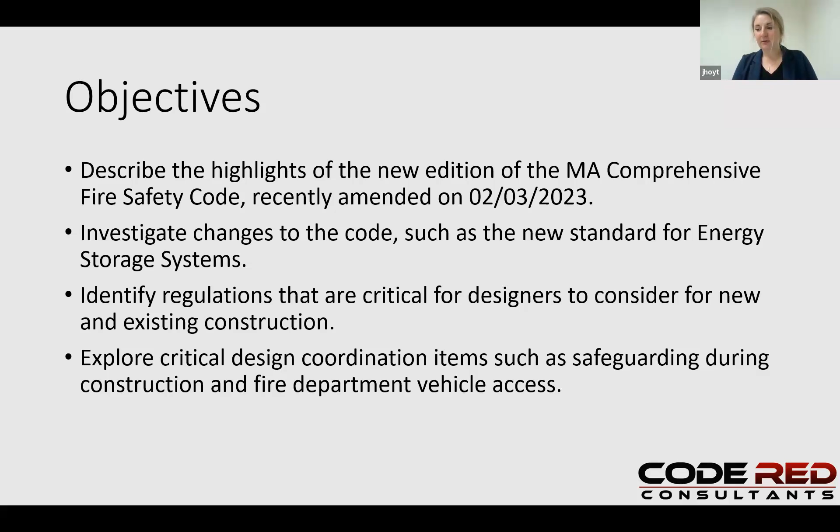There's some things in the fire code that I don't think architects and designers typically know to look for, so we're going to talk about that. And then we're going to talk about some design coordination items. Safeguarding during construction is something that's going to be much more widely enforced at the beginning of the project. And also fire department vehicle access is usually one of the first things considered by the AHJ.

Looking at what the code is, we adopted the 2021 version of NFPA 1. The process is pretty open - all of the meetings are open meetings, and there's discussion on every single chapter of the code. Typically, the board will look at, in this version, we went from the 2015 edition of NFPA 1 to 2021. So the board took a look at all of the changes between 2015 and 2018 and considered whether they wanted to use those or not, and if they could get rid of amendments. And then they looked at the changes from 2018 to 2021 and did the same process.

NFPA documents are fairly easy to use. They're searchable, so you can go online. They're free to view, and you can type in whatever topic you're looking for into the search function, and it should pull up all the different sections that that's in. There's also an index in the back where you can look at whatever you're looking for, and it'll tell you the code sections where that's mentioned. So it's a relatively user-friendly code - that's the intent. I think the more that you use an NFPA document, the more familiar you are.

Typically, the beginning chapters are administrative. Chapter 1 tells you about the jurisdiction, 2 are your reference standards, so it tells you the edition of NFPA 13 and NFPA 72, and then 3 is your definitions. Beyond that, the standards go from general requirements in 4, 5, 6, and then usually have more specific requirements on the tail end of the code. So you have to go through all of the code, make sure that you're picking up those general requirements that apply to all different types of buildings and occupancies, and then move forward into the more specific types of occupancies.

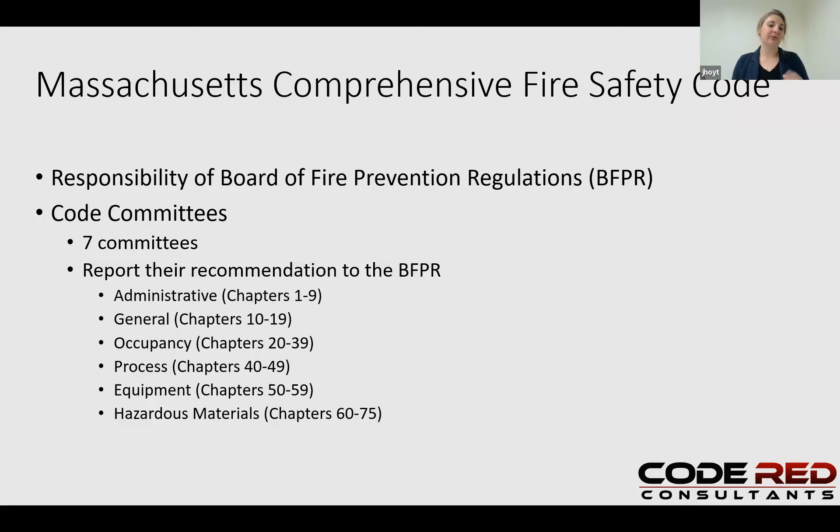I'm going to get into those specifics a little bit. I know that as architects, you don't dive into the fire code as much as fire protection engineers might, or even probably fire protection engineers in most cases don't dive into the code that much. But I do have all the sections in the presentation so that you at least see it, so if something comes up on a project, you can be like, oh, I remember that was a title of a chapter in the fire code, and at least you have an idea that there might be some regulations.

We call it the Model Fire Code because it's based off of the Model Code of NFPA 1. There's always a lot of opinions on whether or not the state should have gone with NFPA 1 versus the IFC. There's a bunch of technical committees incorporated in the NFPA codes, and because there are so many different NFPA standards, there's the opportunity to get really technical. They're updated every 3 years, and it covers a vast majority of input from industry and different stakeholders. So it was determined that that was the best code to go with. Building code references NFPA standards anyways, so instead of going another step through the IFC, we decided to just go straight to NFPA.

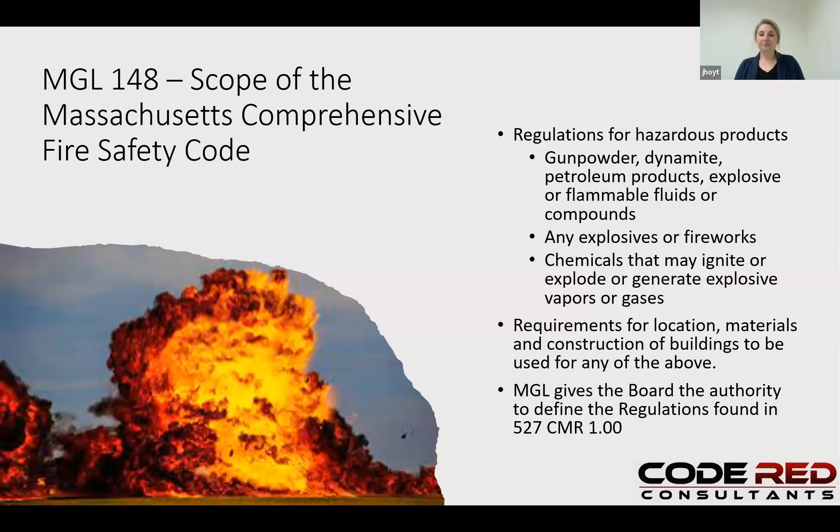So some of the differences between 527 CMR and NFPA 1: all of Chapter 1 has been replaced by Massachusetts. Like I said, that's the administrative chapter that lays out the jurisdiction and what the AHJs can do through the fire code, what might be under the building code, and pulls in references to other codes used throughout the state. All of the permitting and licensing requirements are in Chapter 1.

It's a one-stop location to find everything you could need about permits through the fire department. There's a table of note for the quantities of hazardous materials, Table 1.12.8.50, which lists whether you need a permit through the fire department, which is your local fire department, or a license, which is through the town. Usually high quantities of materials will require a license. So if you have some type of manufacturing building with large quantities of hazardous chemicals on site, that site needs a license through the town, through the Board of Selectmen or whatever the structure is, in order to have that amount of chemicals on site.

Also, Chapter 1 outlines the BFPR appeals process, which I'll talk about at the end of the presentation. That's something that was brought into the NFPA 1 series of codes that wasn't in the 527 CMR chapters before 2015. So it's nice that there's an appeals process laid out very clearly.

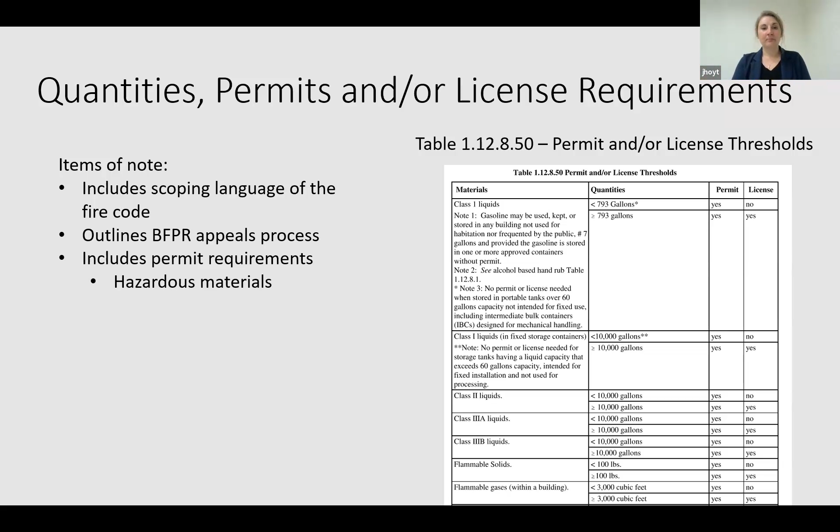Chapter 2 covers our reference publications. So if you're looking for what version of some random standard might be referenced in the fire code, it's in Chapter 2. All of the reference documents are listed as whole codes, and where there are only citations to certain sections of codes, that's a separate section. So you can go and see exactly what part of a code might have been adopted, and the rest wouldn't have been adopted in Massachusetts.

There's kind of a hierarchy because the fire code is Massachusetts specific. Where requirements of a reference document differ from the Massachusetts code, the Massachusetts code will prevail—that's the one that applies. It doesn't happen very often, but sometimes there are more specific requirements, typically Massachusetts amendments, that supersede those standards. We did change a couple editions of some of the reference standards, so check the amendment package. It's a small list—the only NFPA standard we changed is 241, construction safeguarding. Instead of adopting the 2018 version, which is part of NFPA 1 2021, we adopted the newest one published, which is 2022.

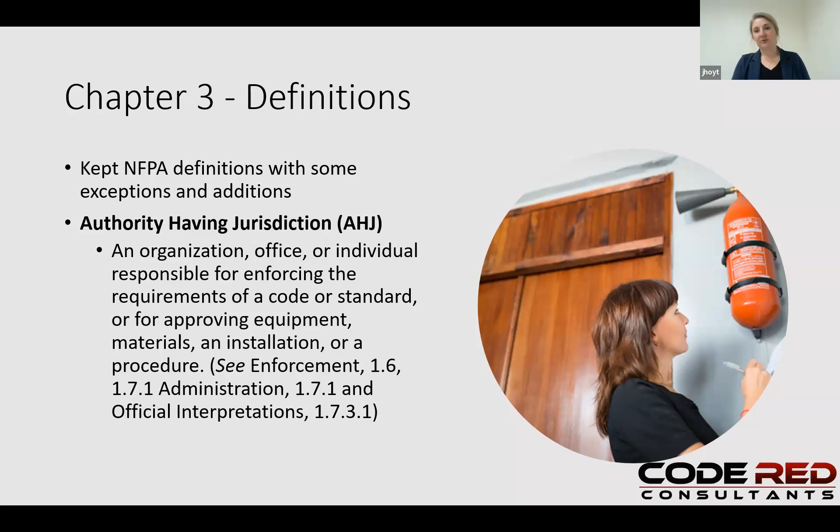The AHJ could be the building official if it's a building element, the fire official if it's a fire element, or the forest warden if it's an open burning requirement. In most cases, the AHJ is going to be the fire official because we're in the fire code. But be aware that if a requirement crosses over to building code, the building official has authority to enforce it, while the fire official has the authority to require its maintenance.

A good example would be a control area wall, a rated wall around hazardous materials. The building code tells you that you need that wall, whether it's 1 or 2 hours, and the construction requirements, and the building official enforces it. Unfortunately, once a certificate of occupancy is issued, the building official doesn't have as many opportunities to go into that building as a fire official might. So if there's a big hole punched in the wall and the fire official sees it, they have the maintenance requirement—they can say this wall isn't being maintained to 1 or 2 hours, whatever it was built to, and it needs to be maintained. How that's done goes through the building official because it's a wall. It's a little confusing, but hopefully the local jurisdiction works together, and we try to have fire officials and building officials collaborate on violation notices so that you get both references to the codes.

Going through the code itself, chapters 4 through 10 are the general requirement section. We deleted chapter 4—it essentially just had objectives for the code, like keep your hallways clean, maintain free egress, don't store large quantities of hazardous materials—broad requirements that were being cited by fire officials but weren't specific to the code. Everything in chapter 4 is dealt with more specifically elsewhere in the fire code, so we just deleted it because there was really no purpose to it.

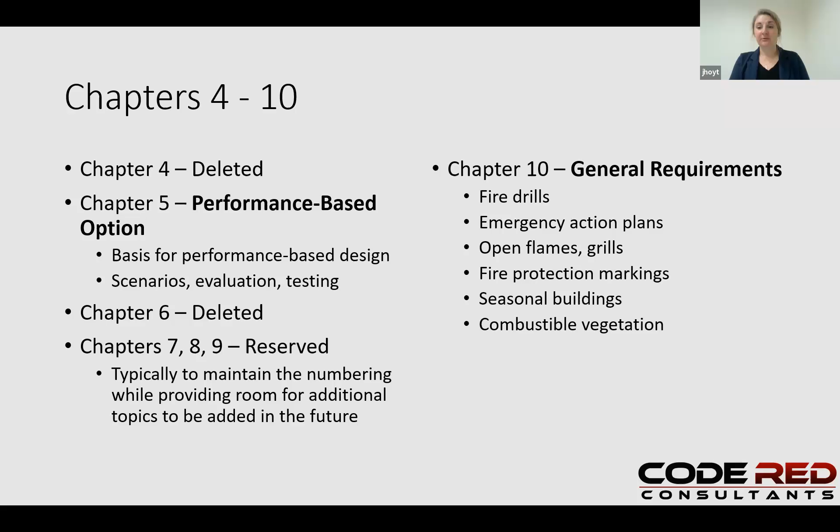Chapters 11 through 15 are more building services requirements. Chapter 11 is called building services—it talks about oil burners, pressure vessels, oil burner systems, and has the requirements for photovoltaic systems. We can take questions on this at the end because I know it's definitely a hot topic right now.

It says exactly the same thing as the International Fire Code, the IFC—it has all the setbacks that are in the base code for IFC. We didn't amend anything; we just didn't delete it because at some point the building code sends you to the fire code, so you have to have something there to close that gap. So it is referenced by the 10th edition for setbacks right now. And like I said, we can take questions at the end.

Chapter 12 is features of fire protection. So that kind of deals with some of your interior finishes.

The building code handles the more permanent finishes like walls, floors, ceilings, things that aren't going to move. The fire code deals with the less permanent provisions, so decorations, draperies, curtains. I've gone into a haunted house in Salem, and they made their own monsters out of paper mache with paint and things hanging off of them, and all of those needed to be tested to a flame spread criteria. They ended up just adding a flame retardant spray on everything. But those requirements are all in Chapter 12 for anything that can be moved around a building.

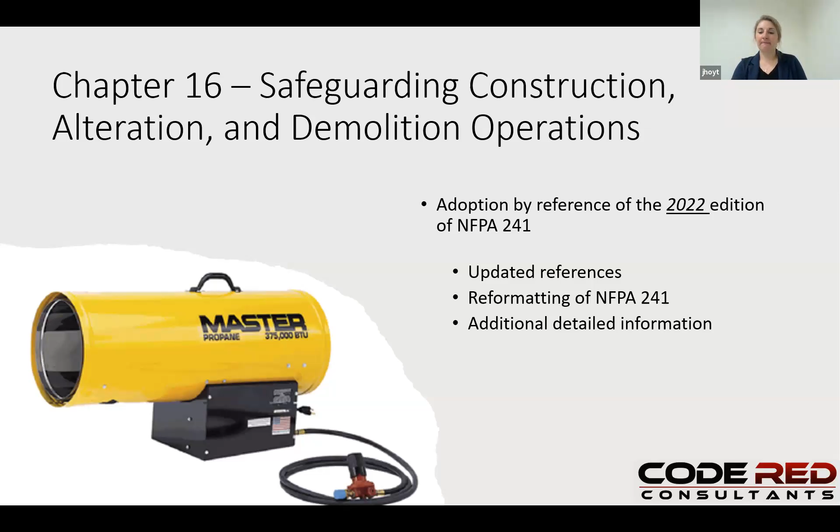It is a hot topic, no pun intended, in Massachusetts right now. There have been a lot of construction fires, and some major construction fires that reached national news. If you're familiar with the fire in Waltham, that was a really big one, and it came on the heels of a massive fire in Cambridge that spanned multiple blocks and cost a lot of money and damage. Both of those buildings were under construction at different stages, and that kind of spurred Massachusetts to lead the charge on construction fire safety. That's part of the reason we adopted the 2022 NFPA 1, to try to be on the cutting edge of that. Because the requirements in the 2022 edition are based on lessons learned between the last version of the code and the newest one, rather than being a step behind, we tried to stay up with the most recent applicable safety standards.

It applies to all new construction, alterations, additions, and demolition. The way that 241 applies is it's scaled. If you have a small renovation, you have a small fire safety plan. If you're doing a tenant fit-out in a multi-story building, you have a safety plan for what is going on with the construction within that tenant space and how that interacts with the egress and the safety for the rest of the tenants in the building.

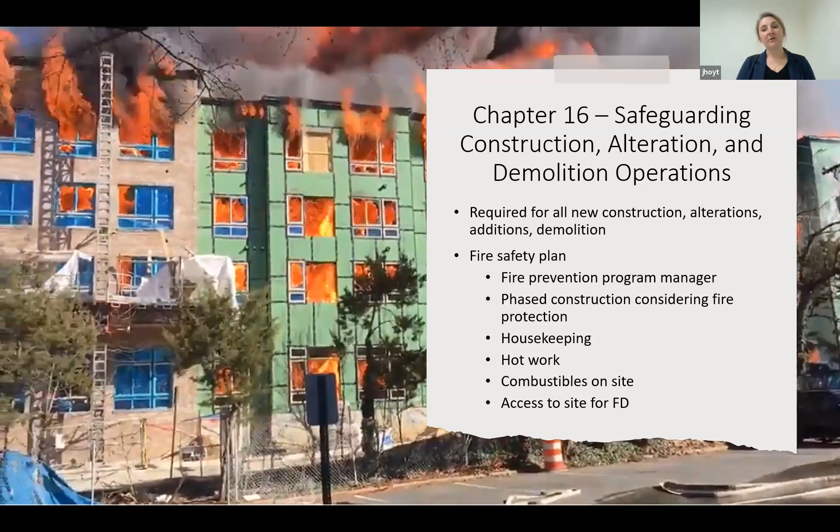But making sure that plan is discussed during the design phase is important, because there's ways to phase construction to think about improving safety in the building, especially with the systems that are put in, like sprinklers and fire alarm systems, that can really help a project move forward and provide more opportunities for consecutive construction to go on if those systems are planned out in the beginning. So it's definitely something to keep in mind.

Chapters 17 through 25 and 27. Chapter 18 is fire department access and water supply - more about that in a minute. There is a section on combustible waste and refuse, which typically comes into play for construction of buildings, but also talks about trash chutes and access to those.

There's also automobile wrecking yards, clean rooms, and dry cleaning. Clean rooms and dry cleaning typically just adopt the NFPA standards that handle those. Not a lot of requirements specific in Massachusetts to those.

So, fire department access and water supply. All new buildings and additions to new buildings need to at least assess their fire department access and the water supply that's available associated with that access.

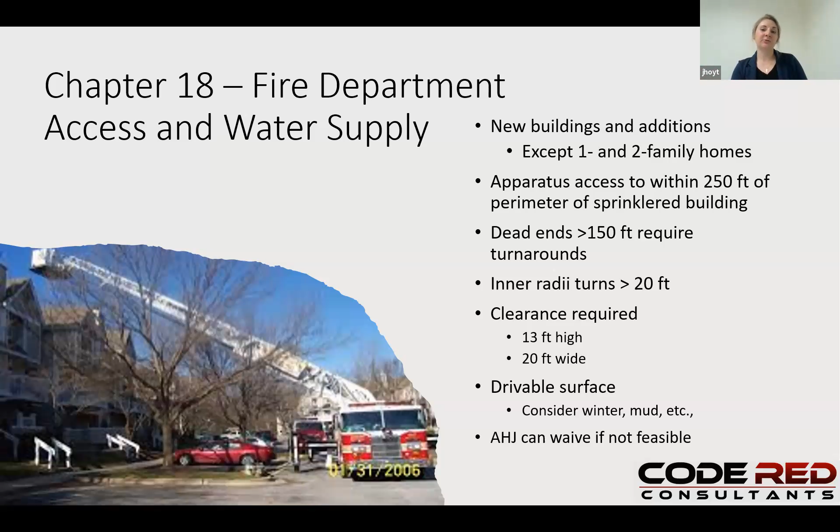So the AHJ in that case waived certain portions of the requirement and accepted alternatives to provide a similar level of life safety.

Chapter 20 is occupancy fire safety. Probably the most important one to think about as designers is paper materials in schools.

And I don't like going into my daughter's school because they don't comply most of the time. Usually in the beginning of the year, it looks pretty good and people have everything organized on the walls, but towards the end of the year, it's just there's more artwork and everything kind of spreads out.

So as designers, you can really help this by providing artwork display areas and display cases. There are requirements in this part of the fire code that lay out exactly how big those spaces can be, how they're distributed down the hallways, what it looks like in a classroom. Essentially, you don't want to have a lot of paper in egress hallways because a fire can spread along the wall much faster around paper, especially if it's in a vertical orientation.

And most of those hallways typically have a higher class of finish for the interior finishes to provide less fire spread. So putting paper on the walls kind of defeats the whole purpose of Chapter 8 of the building code. So there are some allowances, and a lot of them are attached to bulletin boards, which is a good way to meet those requirements, especially if it's a designated area.

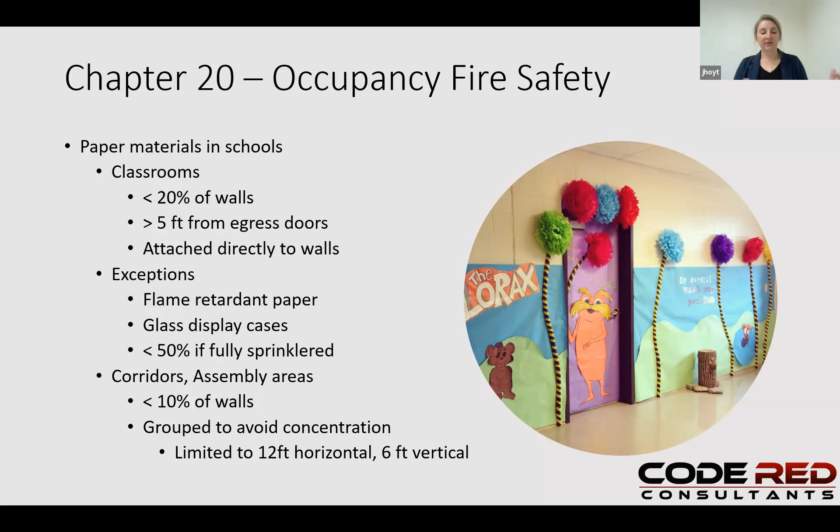Chapter 26 is not really new. We've had it in the fire code for a while, but it's going to get a lot of attention with the 10th edition.

Essentially, what the FPR did is they put together a task group to look at laboratories using chemicals and the requirements within that chapter, and submitted it to the building code so that there's building code language about labs that use chemicals. Massachusetts is kind of a hub for lab space.

We have a lot of biotech areas in Metro Boston where buildings are growing, and there's a lot of industry space being used for bench scale laboratories, which are not necessarily incredibly hazardous, but there are a lot of containers of flammable materials spread out throughout the building, and usually it's on a small scale, but a lot of a small amount ends up being a lot.

So it is regulated through the fire code, and hopefully if that section is adopted through the 10th edition, it's in the building code and it should be easier to follow on how a building is laid out to comply with this section. Basically, there's different classifications for laboratories, A being the most hazardous and D being the least hazardous. It talks about the type of chemicals being used and how they're stored.

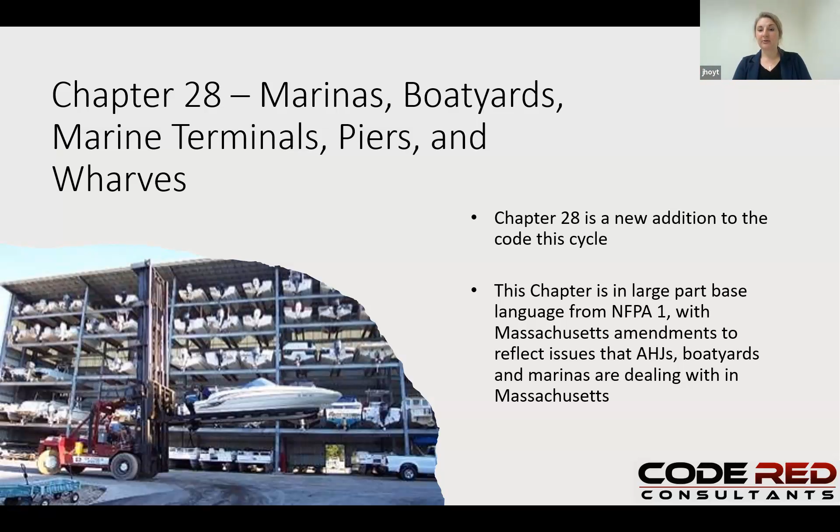Chapter 29 is parking garages. This is also a new chapter to Massachusetts. Most of the parking garage requirements are in the building code because it's a structure. But what we have in the fire code is the maintenance of parking garages.

We did pull some requirements into the building code due to exterior coverings. There's a lot of textile coverings on the outside of parking garages for advertisement space or to kind of cut down the wind. But if you cut down the wind, you're also cutting down the free movement of air.

So if something is added to a building after it's been approved as an open parking garage, it needs to be evaluated to make sure that it still meets the requirements of an open parking garage in terms of air movement, or you have to add some kind of ventilation system.

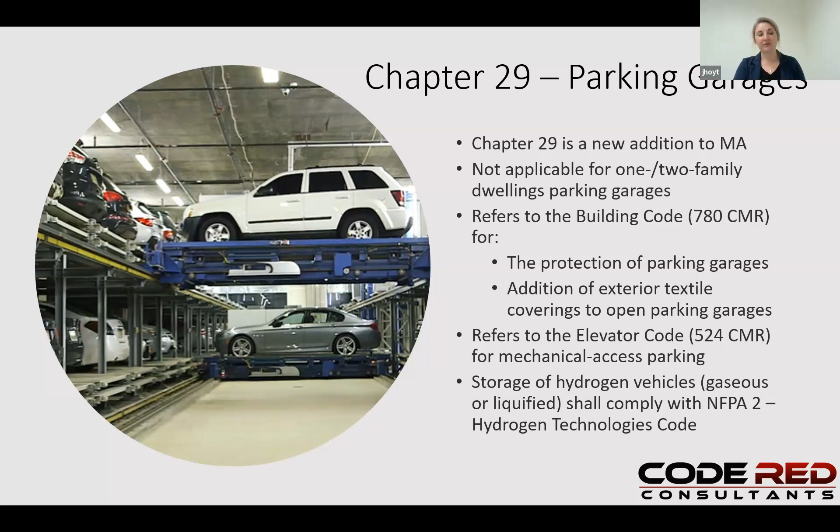I think I just looked at a project that has 3 levels. So once we start going beyond that, you really need an engineering judgment as to how that works and how that's protected. There's also some provisions for the storage of hydrogen vehicles, which is not as fast moving as electric vehicles, but I think it's coming on the heels of electric vehicles.

So with parking garages, you have unique hazard considerations, and we had a large loss fire in Worcester, and there was a large loss fire in Liverpool, and a couple more internationally. So it has been researched a lot more through NFPA and FM Global and companies like that.

Specifically, car stackers create an increased hazard because you're taking your combustible load, which is a car, and a lot of the car parts are plastic. You have upholstery on the inside.

A lot of the metals used in cars are flammable, and you're taking that and putting it up in the air. So now there's airflow all around it, the fire doesn't have a limited oxygen supply, and it's up high. The issue is it obstructs the sprinkler from reaching the car below, and firefighters walk into a building like this and try to figure out how to deal with that. Most of the time, to put out a car fire, you have to put a hose inside the car itself.

So getting up to the 2nd level safely is incredibly difficult. The prescriptive sprinkler requirement for 2-level car stackers is extra hazard group 2, which is a lot of water. So if the building is put in an area that doesn't have a very good water supply, that might trigger some requirements to upgrade the fire department water supply fire protection system in the building.

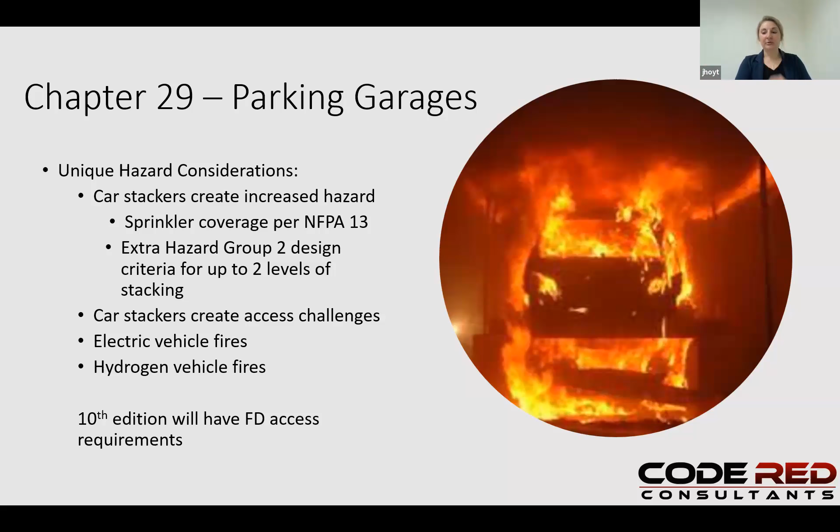The 10th edition has requirements for fire department access, so walkways at the level of the highest car stacker, every certain amount of horizontal distance, stairways out of pits instead of ladders, so that it's a little bit safer to get out, access from the outside of the building, things like that. So it's definitely going to be something to consider. It's all in Chapter 4 of the building code where it talks about parking garages.

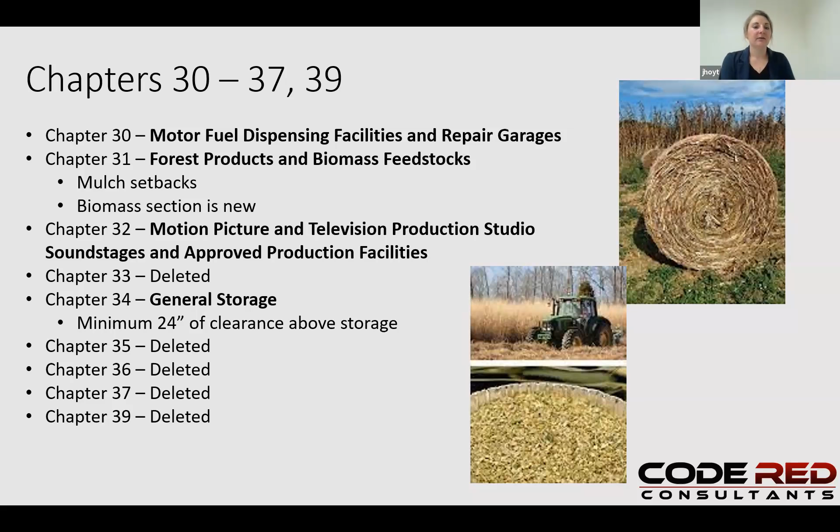Chapters 30 through 37 and 39, just something to be aware of. We have multiple chapters. A lot of them don't really apply to design considerations because they're outside, but just so you've seen it.

There are requirements for motion picture and television production studios, sound stages, and approved production facilities, which is a doozy of a title. But it's just kind of a fun thing that we have in the fire code. There are a lot of movies being made in Massachusetts, and when any of those special effects are used on site, or there's temporary generators and power for a crew and video equipment, that's all regulated through the fire code because it's not permanent, it moves. So there are provisions for that, just in case you were curious.

Chapter 38 is cannabis growing, processing, or extraction facilities. In the 10th edition, we are finally adopting the same language in the building code. So the language that's going to be in the fire code says exactly the same thing, and is really just used for maintenance, now that it's going to be in the 10th edition for building design.

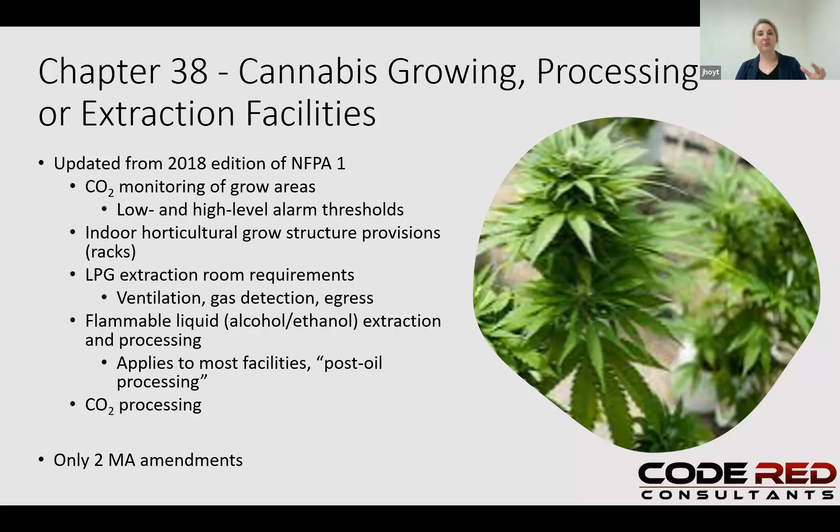But there are provisions for monitoring of specific gases used for growing, like CO2, and then the process of extracting the oil from the leaf uses LPG or alcohols that are flammable. And so any kind of facility that has cannabis typically has some level of extraction associated with it. It might be just a bench scale kind of flammable liquid process with alcohols, but that is still a process, and it still needs a permit through the fire department because you're using hazardous materials in a way to produce something.

Chapters 40 through 45 are a lot of the process chapters. We've got dust explosion, welding, and other hot work, which is definitely a construction requirement. Refueling is your self-serve gas stations, spraying, dipping, and coating using flammable combustible materials. A lot of spray booths that you might see in car repair shops or manufacturing facilities for aerosolizing the particles of the flammable paint into the air, so it needs to be contained and protected in a specific way.

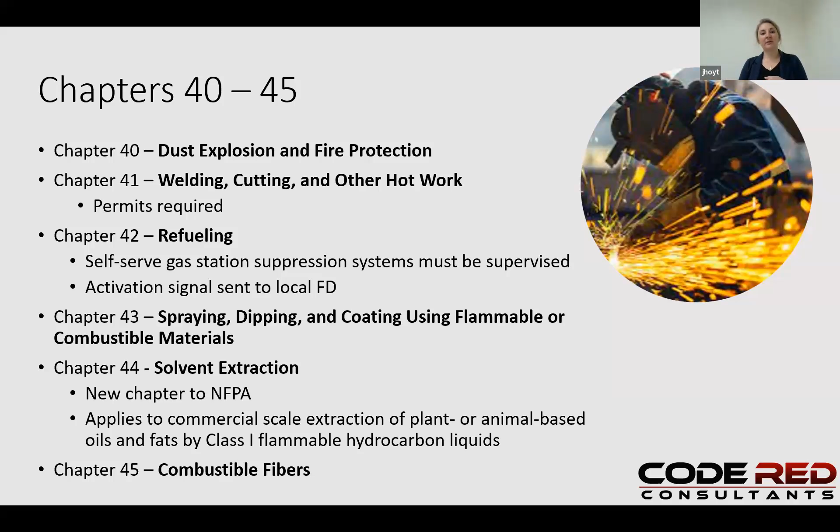There's also a new chapter to NFPA for solvent extraction, which is very similar to the cannabis section, but it applies to other types of essential oils, lavender, mint, all those kinds of things that might use a solvent to extract something. It has to follow a specific standard and be evaluated. And then combustible fibers.

There is a brand new chapter to the NFPA code, and also Massachusetts, for additive manufacturing. And I will say there is a facility in Massachusetts that does this at a very high scale. It's a really interesting process.

They do biomechanical parts like hip replacements and things like that. We went in and took a look at it and said, you know, there's a lot of flammable metals being used. A lot of times it's heated up to a point where it can cause a fire. And in this case, they were using lasers and melting the metal on top of what they were building, so it's very, very precise. And we said, okay, this seems pretty hazardous, we should probably have an analysis on this building.

And 2 weeks later, they had a fire. It was contained and the fire department responded, but it's not very often that we go into a building and look at something and then we're proven right almost immediately afterwards.

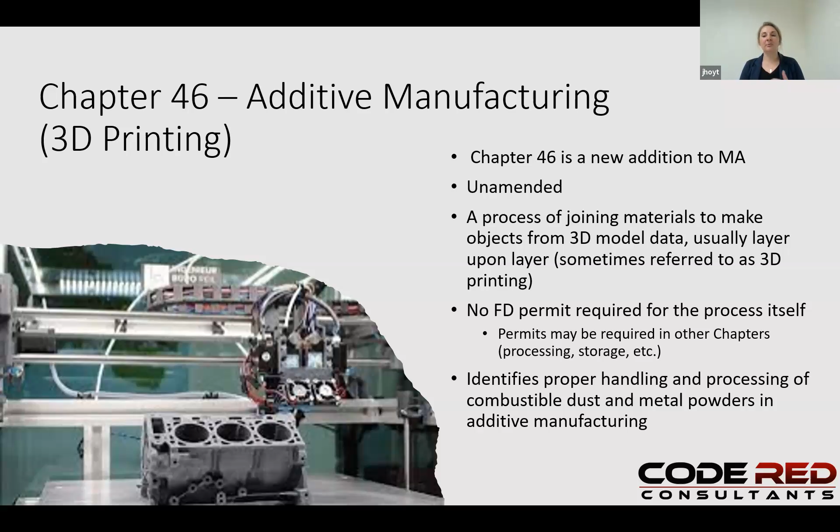So there's no fire department permit for the process itself, but a lot of the materials that are used are flammable solids. And the requirements kind of talk about the proper handling and processing of the materials that are being used.

Chapters 47 through 51. Chapter 50 is commercial cooking requirements. Nothing new really changed there. You still need to have a commercial cooking hood suppression system over equipment of a certain size, basically a commercial size.

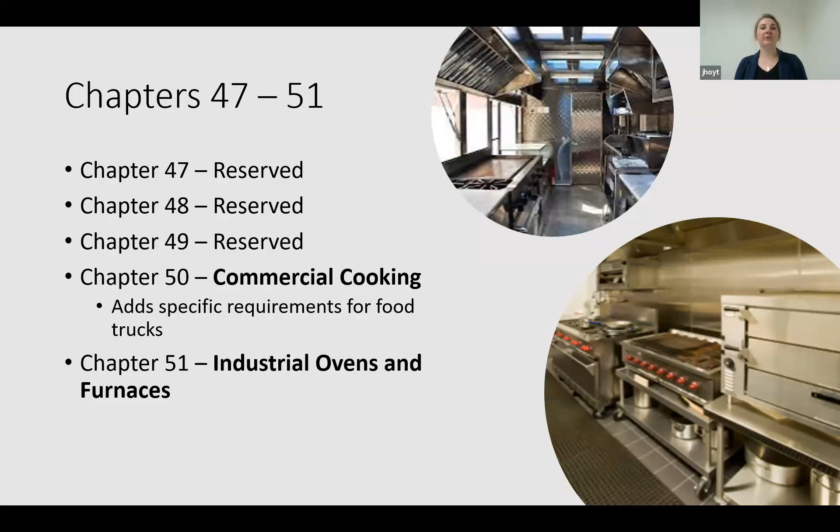There are some new requirements for food trucks, which is good because they do move around, and having a statewide standard helps jurisdictions quickly approve a food truck within their jurisdiction. And then Chapter 51 is industrial ovens and furnaces.

Chapter 52 is energy storage systems. This is one of the ones that we specifically wanted to go into in this presentation. We adopt the 2020 NFPA 855, which is a brand new NFPA standard, and they're already publishing the 2023 version, which has some updates but pretty much covers the same material.

So if you have a commercial building, there's a fire department permit required for any energy storage system that has over 20 kilowatt hour capacity. And that depends on the chemistry. It's a little bit smaller if you have something brand new, a new technology. You definitely have to get a permit at 10 kilowatt hours.

There's hazard mitigation analysis for ESS over 600 kilowatt hours. And essentially, because you have a very flammable material within these batteries, there needs to be emergency operation plans.

There's limitations on how dense the energy storage can be within a certain fire area. So a lot of times, if you're going to have it in a building, it needs to be split up between multiple rooms, or there has to be space between the units to create a fire break.

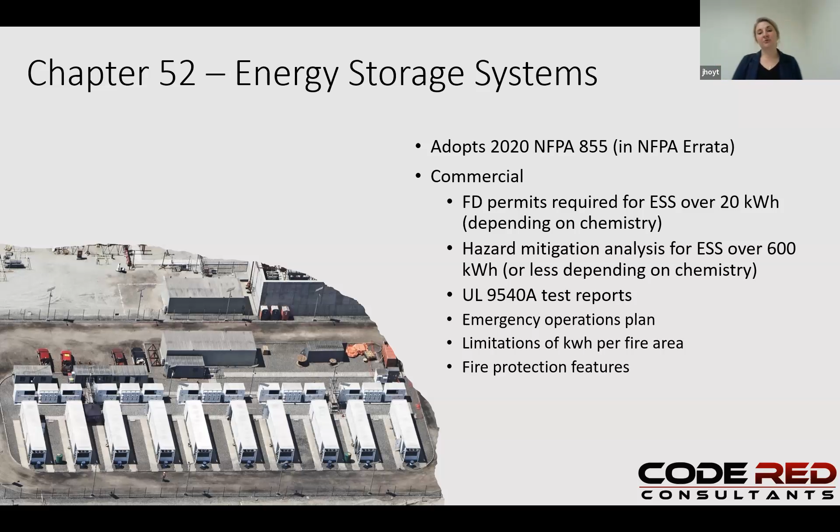And then there's specific fire protection features. Depending on the chemistry of the ESS itself, maybe water's not the best way to protect it. There's some quick notification. I think we're going to see a lot of these put on rooftops to go with the solar provisions to meet some of the energy code provisions coming into the state. So you need to have radiant heat detection on rooftop installations, which is essentially a flame detector.

So the chapter does talk about indoor and outdoor installations. Right now, we're seeing mostly outdoor installations. You can have indoor installations, and it's probably best to have it in a dedicated building because there's a lot of requirements when it's incorporated into an otherwise occupied building.

You need to have fire department access through all those solar fields to get to your energy storage system so that they can get there quickly and deal with whatever the fire is.

Means of egress applies with the building code, but then there's some extra requirements like signage and impact protection. If you have a warehouse where ESS might be within the warehouse floor, making sure people don't drive into it with forklifts, there has to be some type of impact protection to protect the batteries.

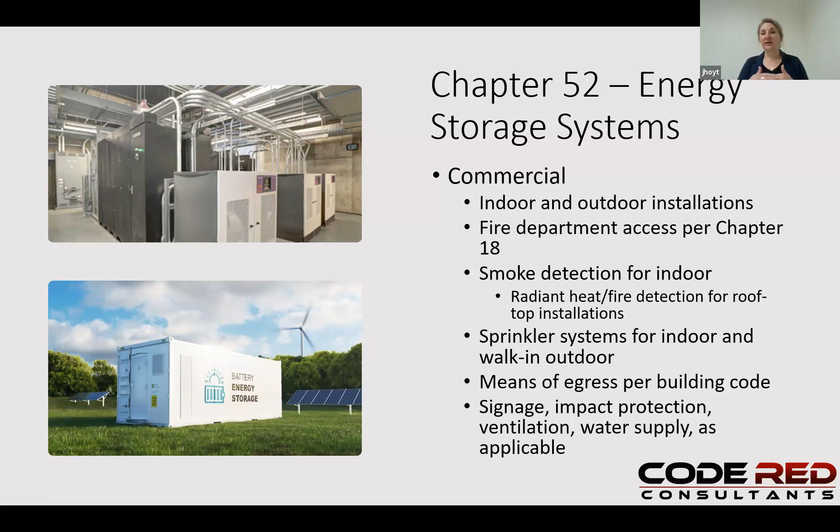They do off-gas toxic gases when they're being charged. So just during regular operations, there is a toxic and flammable gas given off by most of these batteries. So regular ventilation is required to keep the air moving and not allow that flammable vapor to hit those limits where it's going to cause an issue.

For 1 and 2 family dwellings and townhouse units, we had a memo that went out from DFS and BBRS in June of 2021, and we were working on this code at the time, so we took most of those provisions from the memo, reviewed them in a technical committee, and added some to the code where NFPA 855 did not have them. So it's very similar to NFPA 855's requirements for 1 and 2 family dwellings and townhouse units, but there are a couple additional Massachusetts requirements that have to do with documentation and decommissioning and some things that weren't addressed in 855.

Permit is required for an energy storage system over 1 kilowatt hour in a house. So if one is put in, the fire department needs to know about it, and there's a permit required. That's something that we knew was coming in the code. So basically, all energy storage systems installed in houses need to have a permit through the fire department.

It's mostly just notification that it's happening, because if these are involved in a fire, or even adjacent to a fire, it's important for the fire department to know so they can mitigate that hazard and either try to remove it so that it's out of the building, or stop the fire before it hits the garage or wherever these units are located.

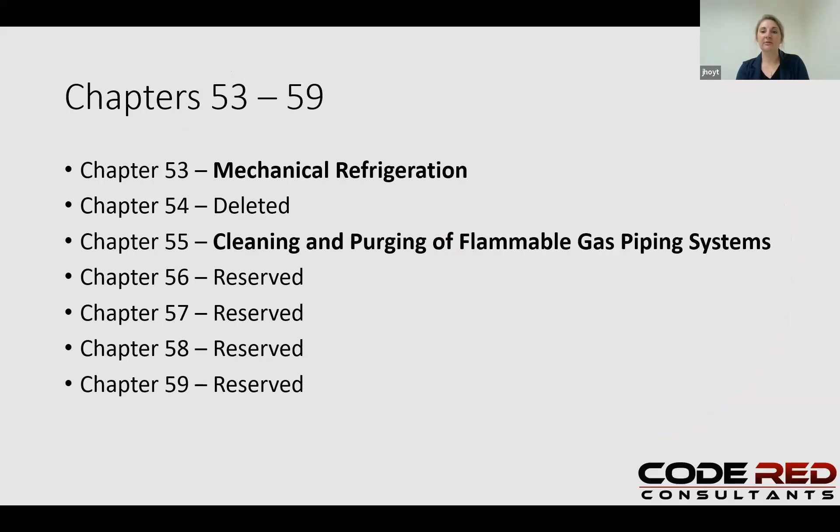Chapters 53 through 59, most of them are deleted, but you have some equipment, mechanical refrigeration, and flammable gas piping systems. Chapter 60 is hazardous materials.

This is where you find all of your general requirements. We updated our maximum allowable quantity table to be the same that you find in Chapter 3 of the building code, but this has storage and use locations.

A big one that's specific to Massachusetts is if there's a process or processing using hazardous materials, pretty much anything. If it's mixed, heated, cooled, really any kind of physical process, then you need to have a permit through the fire department, mostly notification, but if it's on a large manufacturing scale, then there's federal requirements that come into play and a little bit more analysis. It's a scaled approach.

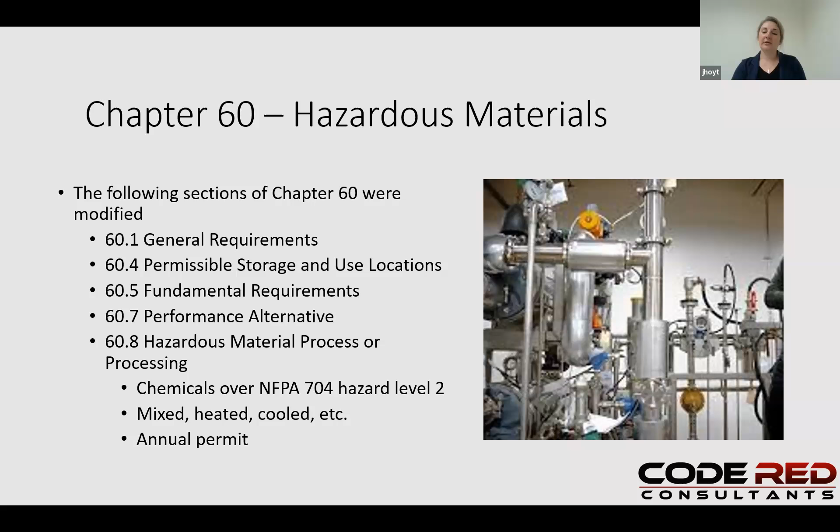Small bench scale things need just a small report, and then larger installations need a much larger report and analysis in multiple levels.

There are some things that aren't required in Chapter 60, and it kind of lays that out. I did talk about material process and processing.

So if you start having labs, just know that this is a requirement and that the fire department needs to be brought in so they're aware of what the hazards are and what to do.

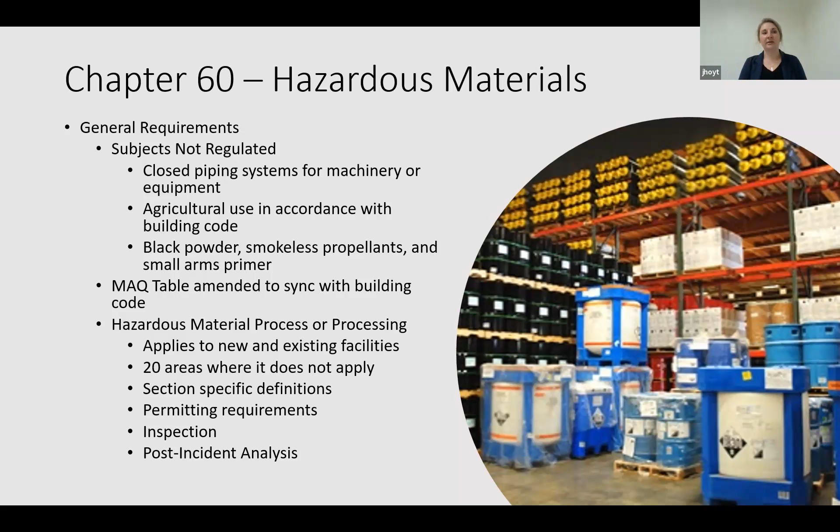A lot of labs will use corrosive materials, and they have high concentrated materials, and that doesn't necessarily trigger this requirement, but it's always good to have a conversation with the fire department so that they're not left walking into a building not knowing what's in there.

Chapter 61 through 64, like I said, it gets into all of the different hazardous materials sections. So depending on what you have, aerosols, compressed gases...

That applies to nitrogen and hydrogen. So a lot of lab use buildings will use some type of compressed gas. So there's requirements in there.

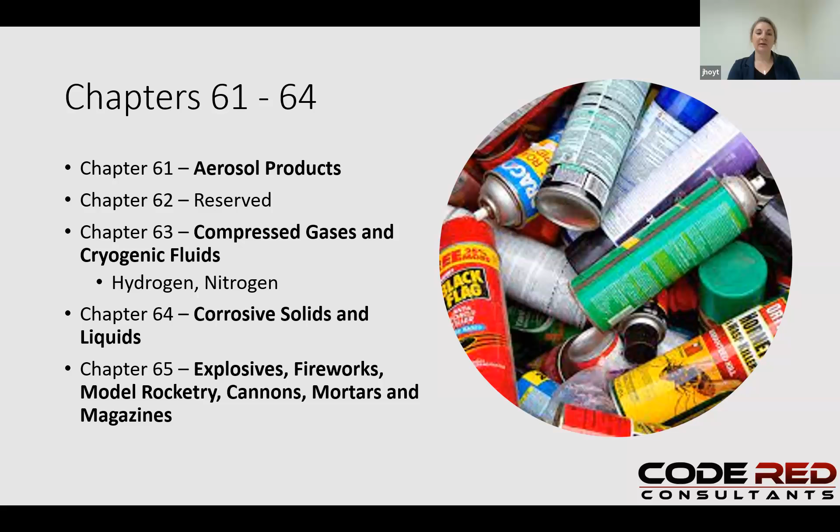And then the fireworks chapter is 65. And then you have all of your different hazardous materials chapters all the way through.

Similar to alternative means and methods that you have in the building code, there's a section about compliance alternatives. The provisions of the code don't prohibit the use of equivalencies, but if you're going to provide an alternative to the code, it needs to be well documented on why that's needed and how it's meeting the intent of the code in terms of fire and life safety.

And in these cases, the local AHJ can approve it, or they can deny it and send it to the Fire Prevention Appeals Board. So very similar language to how the building code is set up, and a very similar process.

There are 3 voting members, I believe. Sometimes there might be more that attend, but typically there are 3 members of the Board of Fire Prevention Regulations selected to hear the hearing.

It's an informal hearing similar to the BBRS process, where you submit an application with your documentation and your support in advance so that the board can read it.

And then the hearing itself is them asking some questions. Why is this here? How do you think that you meet the code? What is your hardship? And then after hearing everything, the board will render a decision.